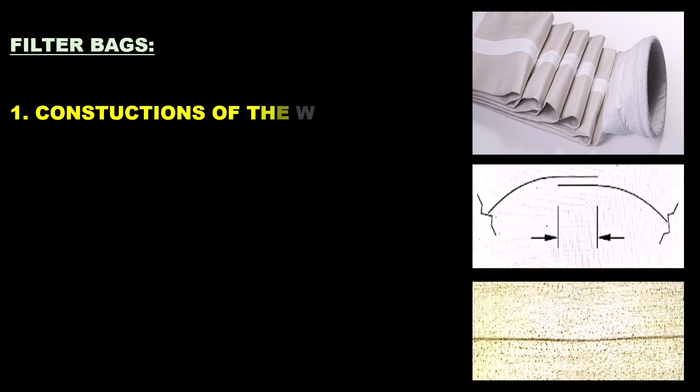Today we will learn and understand the filter bag's welded, or fused seams. Today, we will learn and understand the following topics in the filter bags. The first topic is constructions of the welded, or fused seams filter bags. The second topic is advantages of the welded, or fused seams filter bags. The third topic is disadvantages of the welded, or fused seams filter bags. We will discuss the above topics in the upcoming slides.

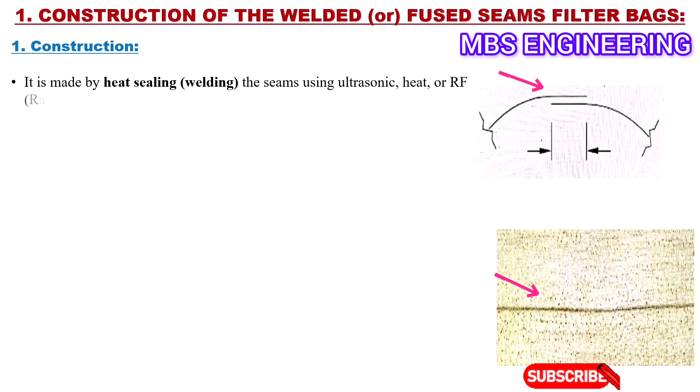Next, we will learn and understand the construction of the welded, or fused seams filter bags. The welded, or fused seams filter bags construction details as follows. They are made by heat sealing, welding, the seams using ultrasonic, heat, or RF, radio frequency, methods. Since no thread is used in this method, these methods work as follows. The first method of the welding is ultrasonic bonding. Uses high-frequency sound waves to generate localized heat that melts and fuses the fabric or material at the seam.

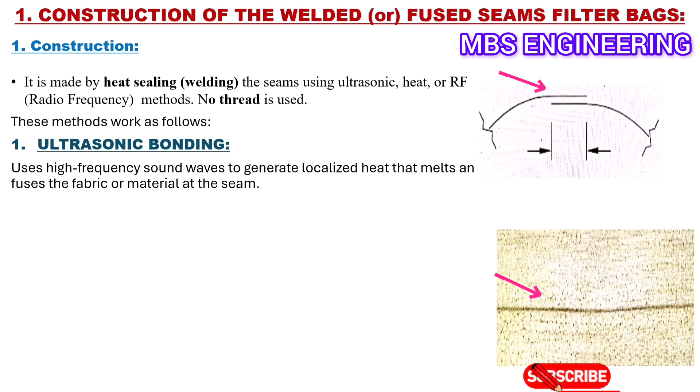The second method of the welding, heat sealing, applies direct heat and pressure to thermoplastic materials to melt and fuse them together. The third method of welding, RF, radio frequency sealing, uses electromagnetic energy to excite the molecules in thermoplastic materials, causing them to heat up and bond when pressed together. Welded or fused filter bags are constructed to enhance filtration performance, integrity, and durability, especially in demanding industrial environments.

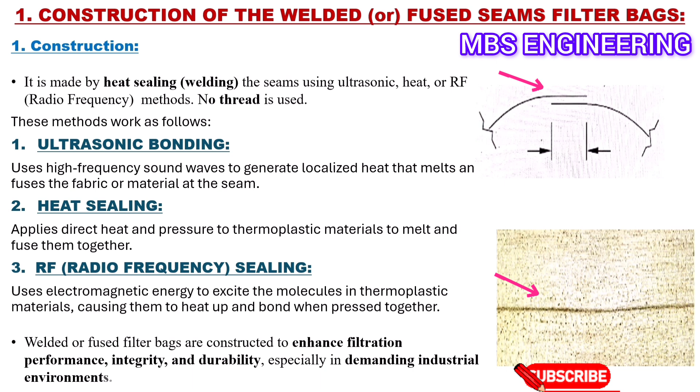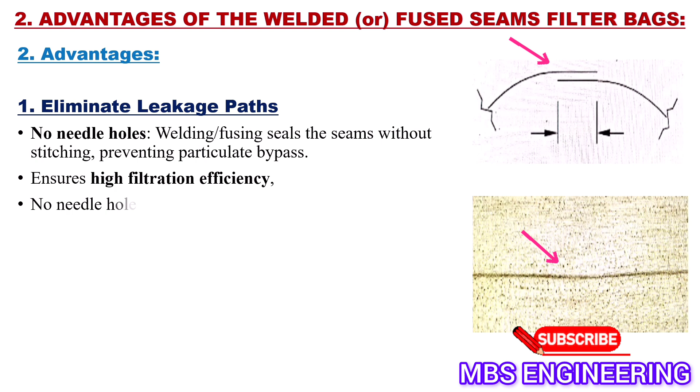Next, we will learn and understand the advantages of the welded, or fused seams filter bags. The advantages of the welded, or fused seams filter bags detail as follows. The first advantage, eliminate leakage paths. No needle holes. Welding, fusing seals the seams without stitching, preventing particulate bypass. Ensures high filtration efficiency. No needle holes, providing superior filtration integrity.

The second advantage, better chemical and thermal resistance, no thread to degrade. Welding avoids the use of thread, which can degrade under harsh chemical or high temperature conditions. Ideal for applications like chemical processing, pharmaceuticals, and incineration.

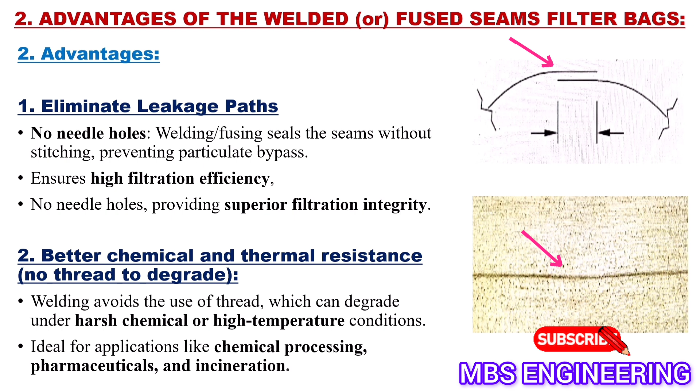Next, we will learn and understand the advantages of the welded, or fused seams filter bags. The advantages detail as follows. The third advantage, strengthen seam integrity. Welded seams are uniform and strong, reducing the chance of seam failure, or bag rupture. Ensures longer service life and greater safety. Fused seams provide strong, consistent seam strength. The fourth advantages are as follows. 95% of standard filter bags made from needle felt are fused worldwide. Fusing is also possible on felt membrane bags.

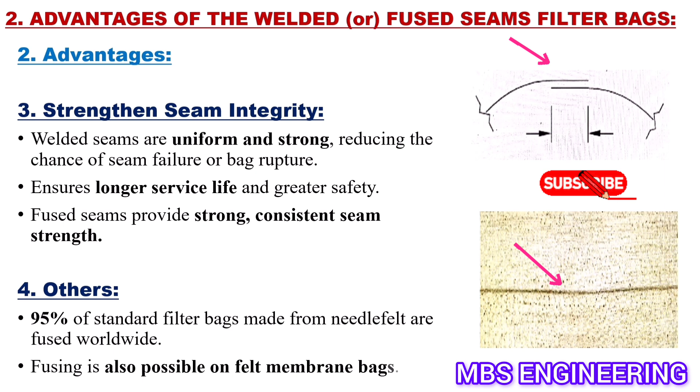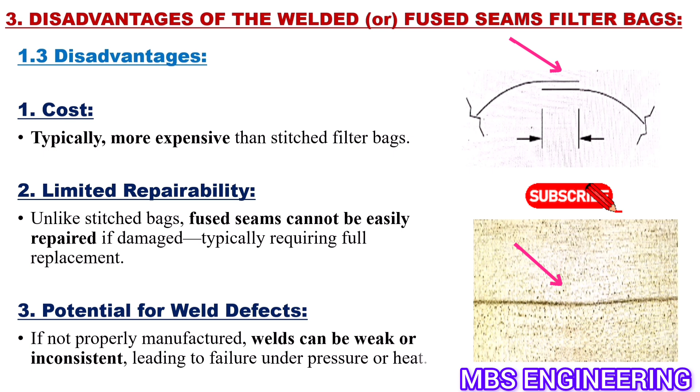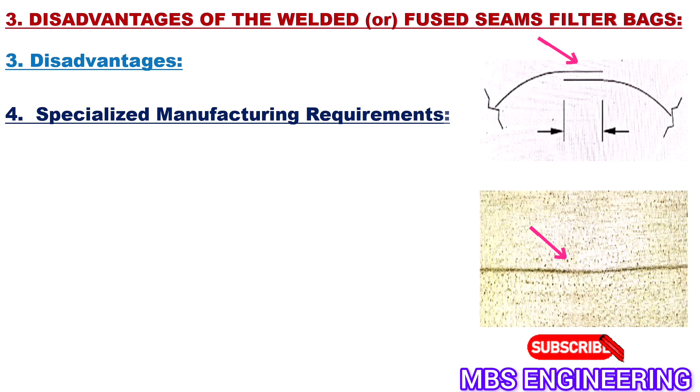Next, we will learn and understand the disadvantages of the welded, or fused seams filter bags. The disadvantages detail as follows. The fourth disadvantage is specialized manufacturing requirements. It requires advanced machinery and technical skill for consistent quality. Not every filter bag supplier can produce them, which may limit availability. The fifth disadvantage, not always suitable for all materials. Some filter materials may not be weldable or may degrade during the welding process. Limits the range of compatible fabric types.

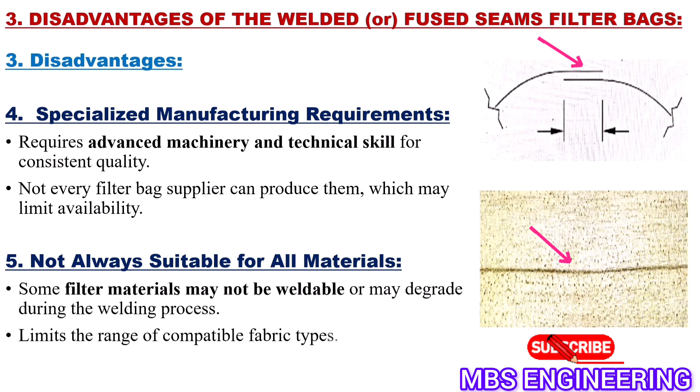We hope everyone learns and understands the following topics in the filter bags. The first topic is constructions of the welded or fused seams filter bags. The second topic is advantages of the welded or fused seams filter bags. The third topic is disadvantages of the welded or fused seams filter bags.